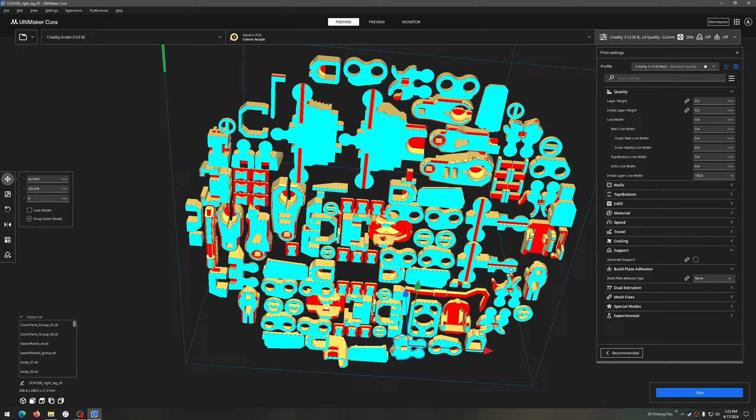Right click, arrange the models. Okay, and that's so it can automatically find the best location for it. Now if I come underneath is where I really want to look at. There's lots of parts that have like this right here.

Why? Because This right here, anything in teal is touching the build plate. And so this right here, this head, it only has these two little spots right here and here.

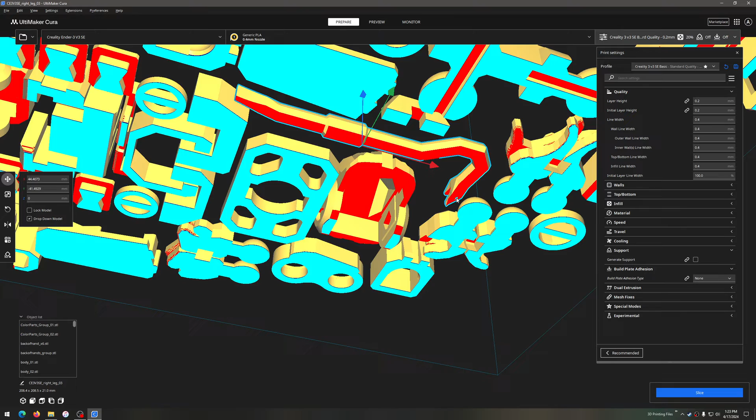And whatever this is only has this one tiny little spot, this crowbar. That little tiny spot is the only place on this entire crowbar that is touching the plate. So that's going to need supports.

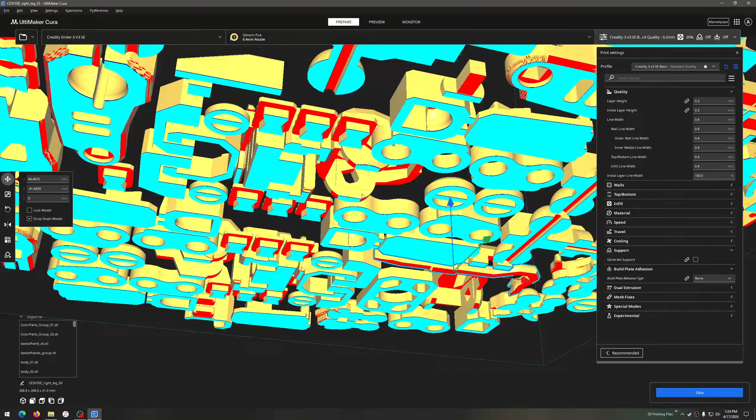It just feels like there's lots of little parts that could easily - these things, I don't know what these are, connectors. They have little tiny pieces. Here's another helmet type thing that's got just a couple of small pieces.

So that gives me pause right away to say, hey, we're gonna need some rafts or brims or something, or supports even on some of these things.

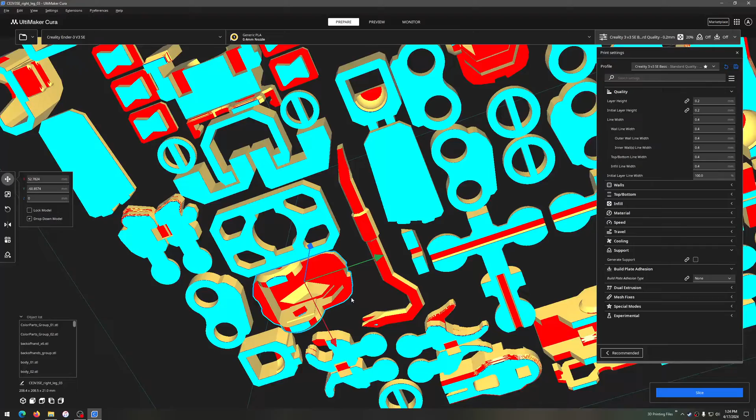Like these helmets, I don't think they're gonna print very well, especially if we look again underneath - you've got all this material under there. Maybe the developer, maybe the builder of these made these so you don't need supports inside there because they're at angles.

That could very well be, but this spot over here might need some support. So this is what I do when I first see a build.

First of all, I never do this. So I'm going to come in here, delete everything. Then I'm going to come back in from my disk.

And is there any way we can... okay, we got back of hands, we've got bodies, color parts, we got crowbars, a gun, we've got head types, we've got joints, we've got...

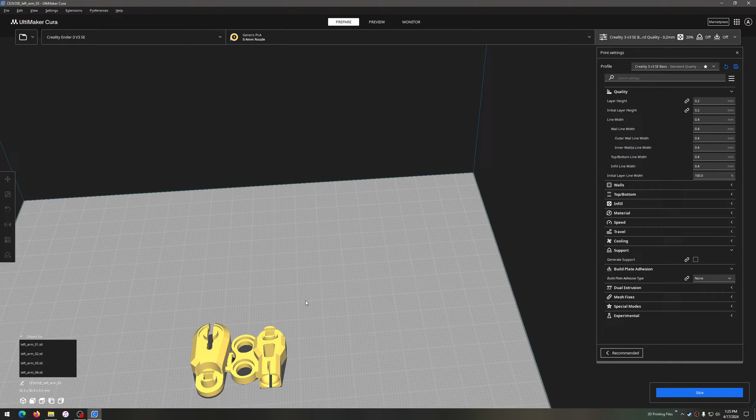Okay, so left arms. See, this is where I break it down into sections. Let's just do the left arm, let's just take a look at those pieces, because it's going to be a little bit easier to see.

Arrange all the models. And this is what I would do if I was going to print this. I'm like, alright, let me just print these.

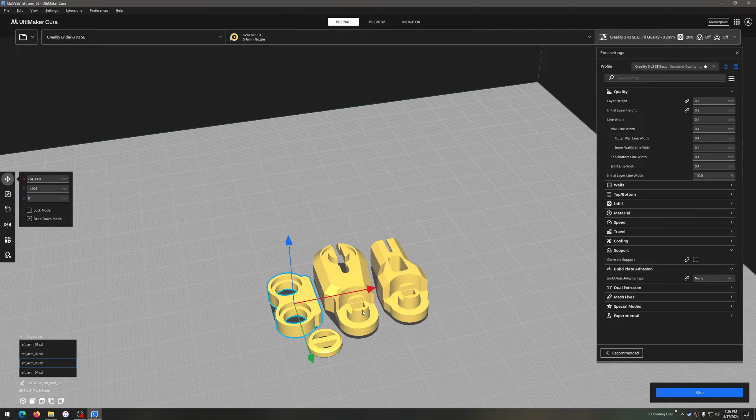And see how these turn out, because I don't want to waste a whole bunch of filament on building everything out and then have an issue with two or three of these pieces. And then I'm going to have to come back and do it again anyway.

So let's take a look at this. And I'm just using basic standard 0.2 millimeter layer height, there's nothing crazy here. I'm just going to use basic default Creality Ender 3 V3 SE settings.

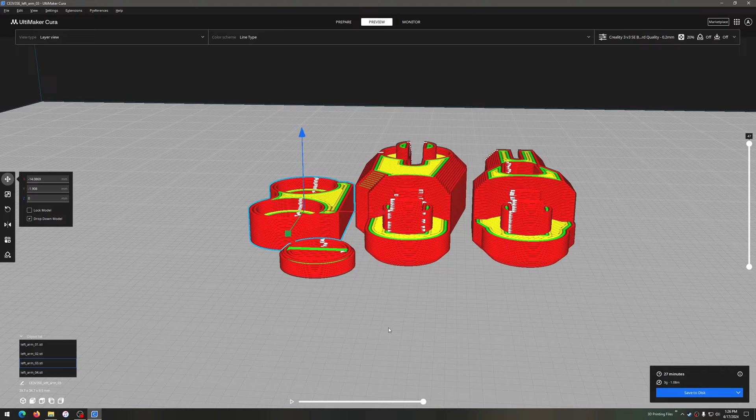So let's slice it, let's take a look. Let's just hide that to give us some more room. So here we can see how it's gonna build.

Top part's not a problem. That doesn't look too bad. I don't see why these would not print well.

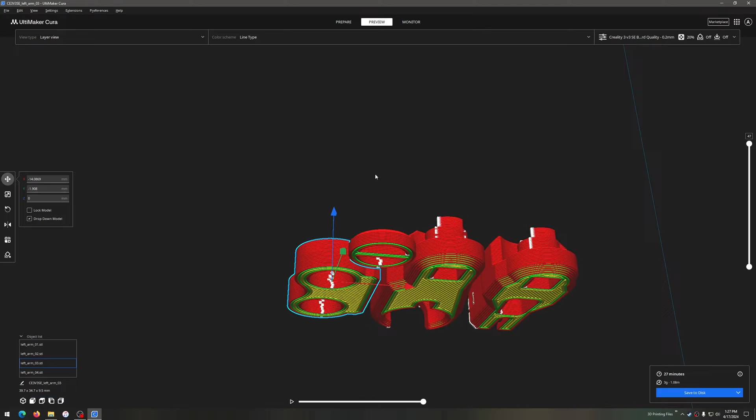Again, this is giving me pause, this one here, because there's not a ton of footprint on the build plate.

And then like here, if I drop this all the way down to layer one. Okay, so we do have some things. Okay, so it's got more than I thought on the build plate.

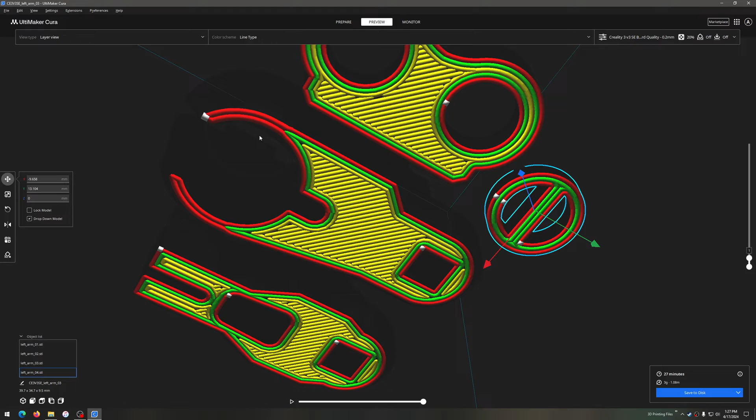Should be okay. So then what I would do is I would save this to disk. Good grief, why doesn't it remember where I just picked these files up from?

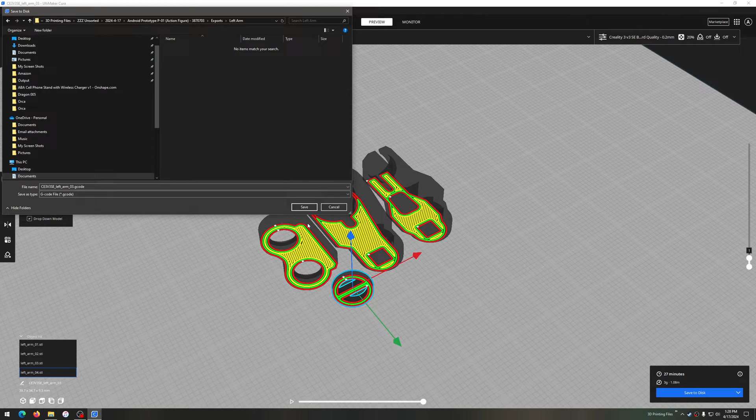So I'm going to create a new folder and call it exports. It's fine, I'm going to go in there. We're going to call this left arm. For now I just want to keep everything organized. Save it to disk. And then I believe I have to erase this.

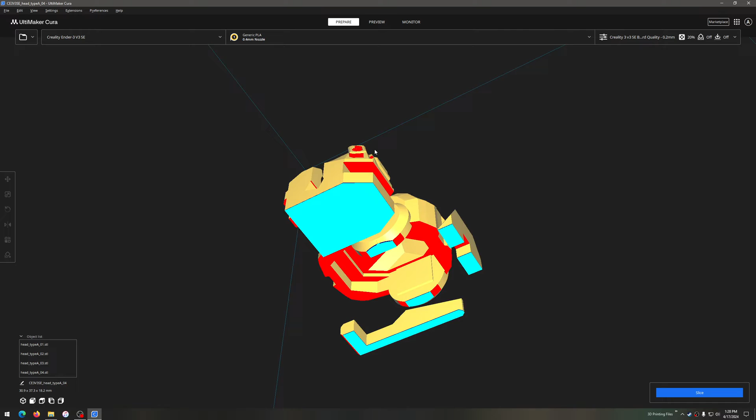I have to clear the build plate, and then I have to add more stuff. Yeah, it's a headache, it's a big process. Let's do head A. By doing this, what I'm doing is looking at every little piece and seeing how it goes. It's very rare for me to have something that I just download, slice, and print. I have to fiddle with every stinking thing.

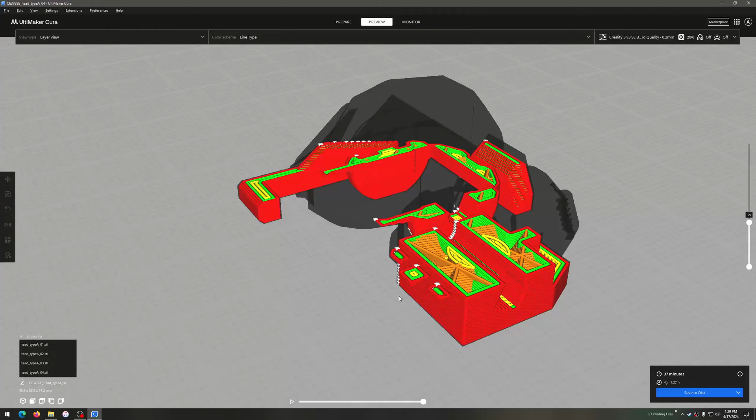Look at this, the red means it's probably going to need supports, because as this layers up, let's slice it and take a look. These parts right here are going to be a problem. We're going to need supports because as this comes up, it's going to want to try and print out in the middle. Look at that, this stuff's just floating in space. So we need supports for this, because that's an impossibility. We can't just print out into the middle of the air.

Let's go back down to layer 1. Yeah, these parts here on the helmet, I don't have a lot of confidence in these little tiny sections being solid and secure enough, especially with this overhang, to help that whole helmet get built.

So what I'm going to do is go back into prepare. I'm going to drop this down. Let's turn to supports. Where's support? Okay, let's generate supports. I'm going to leave it as tree, and then I want to just select touching build plate.

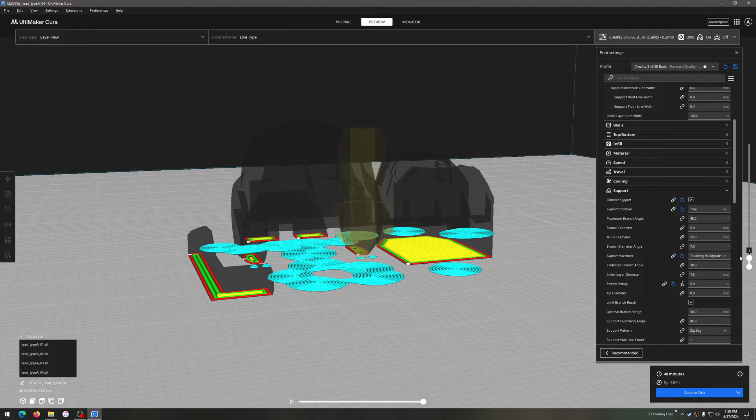Let's just try that. So what that's going to do is generate the support, but only in areas that are touching the build plate. One of the downsides is it's going to create a lot of trees there. Not really a fan of that.

Let's try normal, touching build plate. We'll slice that and see how that looks. So you got to do this. It looks like a hot mess. There's going to be a lot of post-processing cleanup, but this is going to give us the best possibility of a good print, a good outcome.

I still don't like that. What I would do is print this and see if the supports give any structural help with the actual model. So let's go up here and take a look. So the supports really don't do jack for the helmet. So I would be tempted to add...

Build plate adhesion, let's do a brim width, let's just do like 4 millimeters. It doesn't have to be huge, but I know this is crazy, this is stupid. Look at that, that's a lot of stuff, but I want it to print right the first time.

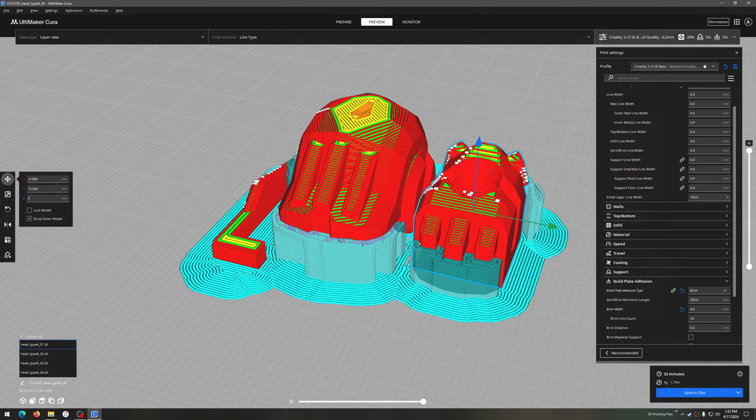This looks ugly. How about we take, yeah, we're going to have the supports. And I don't think you can do specific model settings? How about we do this? Let's take a look, let's do none brim. Let's uncheck that. And I wonder if, let's just check here. Seems like there was a spot where you could do per model settings.

So just for this helmet, I want print supports, and where does that say... generate supports. Okay, this, I definitely want supports. This one seems fine, and this one back here seems fine. Let's slice it and see what happens.

So we might be able to go through and just have, there we go. Oh, it's going to do it everywhere anyway. Then what's the point of having... what? Hang on, close that. Let's uncheck supports, no brim.

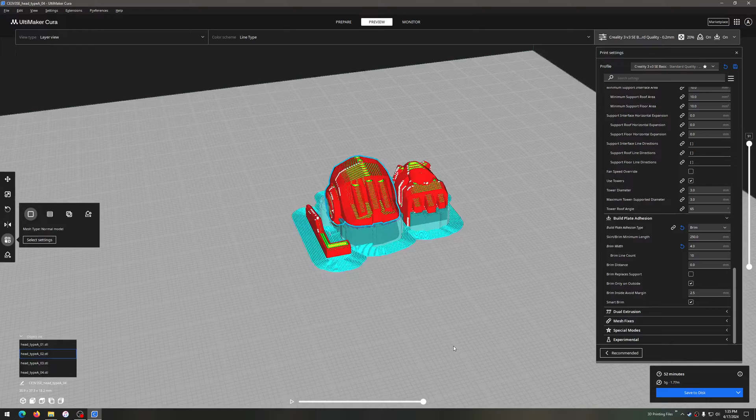What do my stats say for this print? Where's my stats on here? Oh, it's going to take an hour. It's not going to use much filament, 5 grams, that's hard, that's nothing, but it's going to take an hour to print that.

Let's save project. No, let's just save to disk. And this was head A.

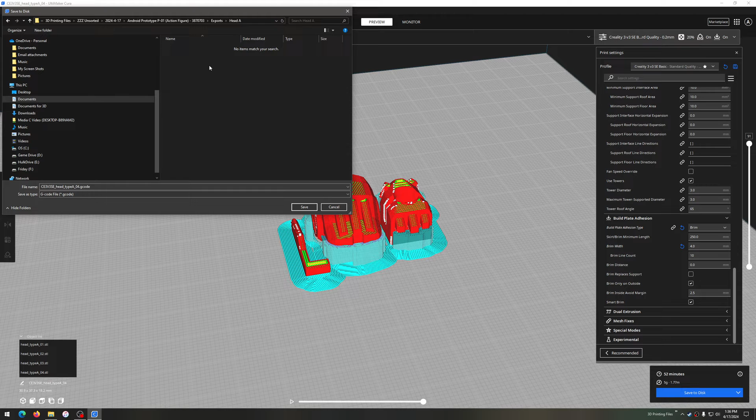Save that. Clear the build plate. What else we got? Let's take another look at some other things. This is what I do for everything, is I'll download it and then look.

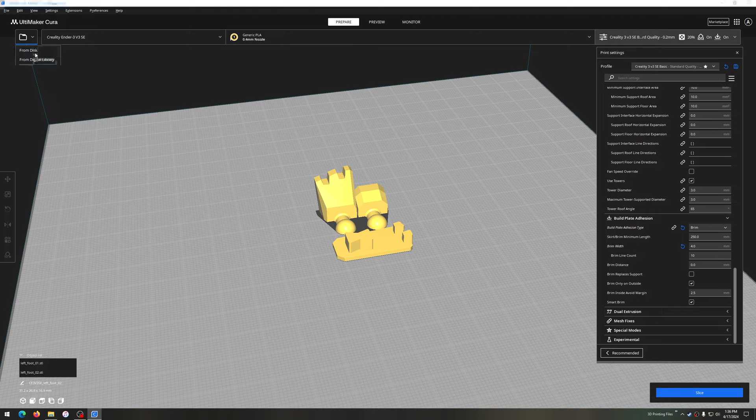Okay, so we have left arm. Let's look at left foot. It's going to be those two. Left foot shouldn't be too bad. Let's arrange those. Let's add left leg. Leggy boy, left leg, there's parts, 5, 6, 7, I don't know.

Arrange the models, take a look at the underside. That looks pretty good. This should print just fine, bridging might be able to take care of that. Let's just slice it and see what happens. But I've got brim already set, so it's going to put the brim on. And then I have support set, so it's going to add the supports. Cura.

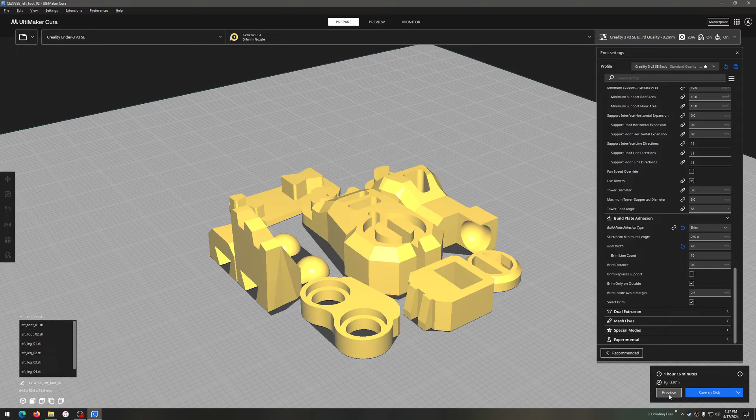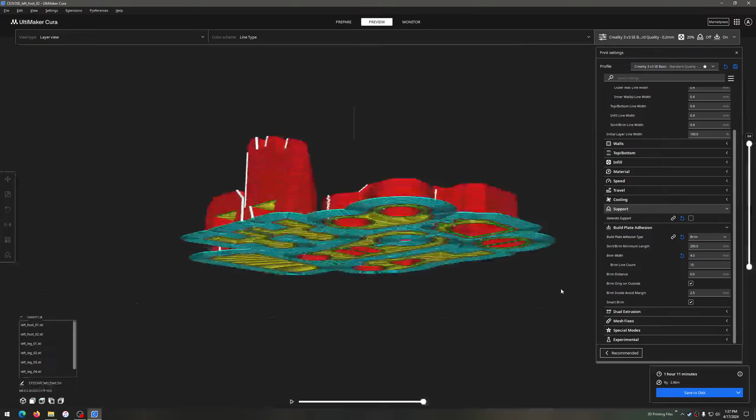I mean, you could leave the supports or the bridging on. I'm going to turn supports off, reslice it. Also, that seems like a lot of brim. It's only 4 millimeters, but this is going to make sure that all these parts that have not so much sticky to the bed part are going to have more sticky to the bed part. It just helps make sure that this is going to just print. So that's going to take an hour and 11 minutes.

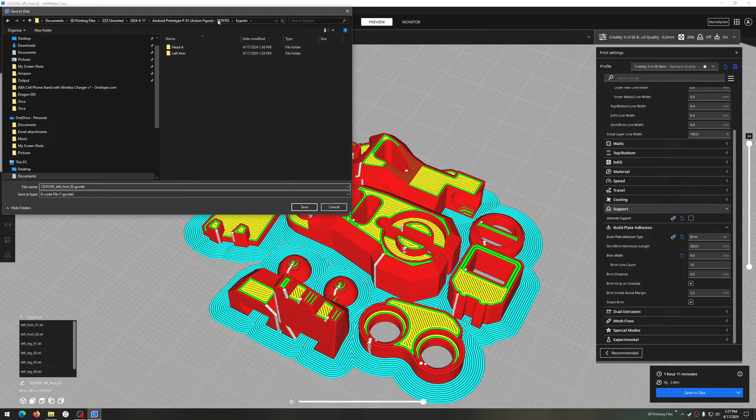Let's save that to disk. But I'm breaking this down so that I can inspect all the parts. Let's clear the build plate. I got to go to prepare.

Let's go back and look at our files. Where's the other thing here? The crowbar. That doesn't have, I mean, if you look at that, you can see through it. So that doesn't need any adhesion, but I am going to add supports normal touching the build plate, and we're going to slice that and preview it. So this is going to be a much better outcome. So we'll save that to disk, and now we can just say, you know, crowbar. We'll just leave that out here. There's not much to that.

Okay, go back to preview, right click, clear the plate. Let's take another look at some other things. Let's look at the body. Body 1, 2, 3. But again, Tim, I know I keep saying it, but this is what I do. This is, you got to do this for everything. Look at that. There's no way that this is going to print okay. One, look at all the parts of it that are hanging in the air, and it just has this one little spot on the bed.

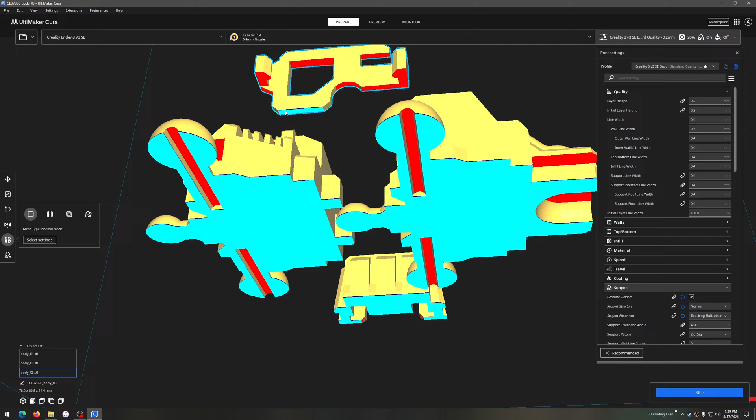That ain't gonna work. I have zero faith in that. Zero faith. Other than that, I think there's nothing in here that I would really need. I don't think I need supports. I might do it anyway. Let's do it just because of these overhangs. I don't like these overhangs. And this section back here, we got all kinds of overhangs.

So I would tree this. Let's go into supports, let's hit tree. And then I'm going to also do brim on the bed adhesion at the 4 millimeters. Let's slice it and see how this looks. I said slice it.

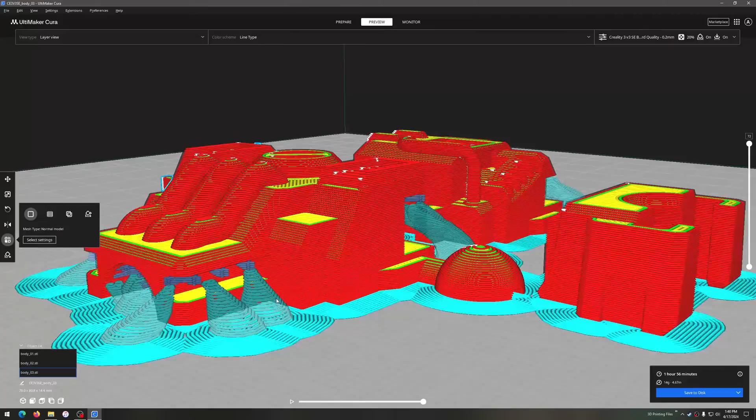So this is using the Ultimaker Cura slicer. It's going to take 2 hours, 14 grams, not much, but look at that. All these places that are going to have supports are getting them from the trees. Okay, the tree supports, but this one specifically that we were having a concern about is now getting brims and tree supports. So I have high confidence that that's going to print and not have any issues.

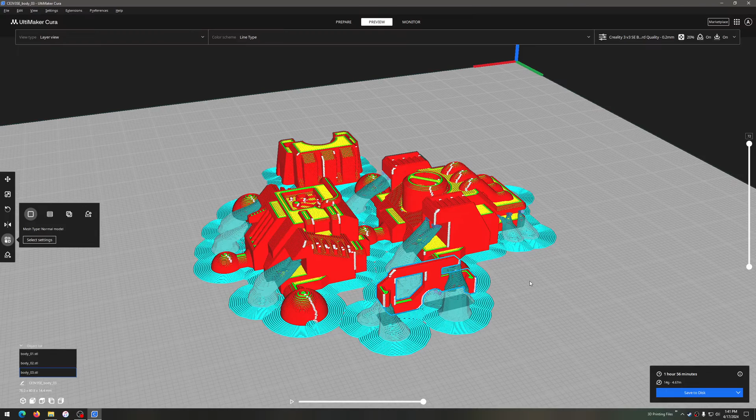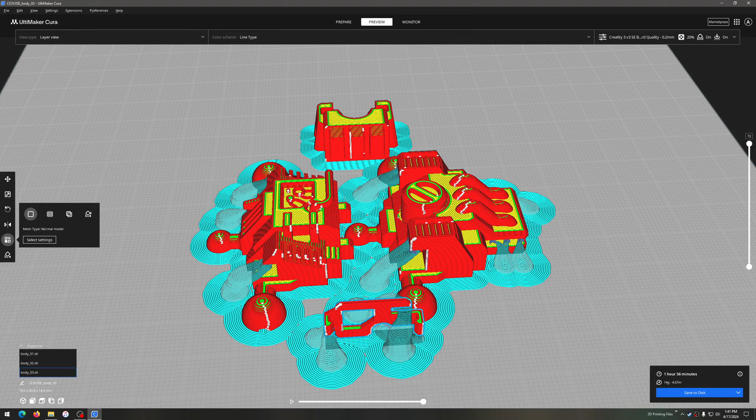Yes, it's a hot mess. Yes, it's going to take 2 hours. So when you break it all down like this, your one robot thing is going to take all day, but you know it's going to be done right. It's going to be done good. There's going to be some cleanup, which isn't a problem. These trees and all these supports really easily break away. It shouldn't be any issue.

Let's save that to disk for funsies. We'll just leave that called body. Now I'm going to go switch over to Orca Slicer and take a look at these files in Orca Slicer just to have a little bit of comparison and show why I like Orca, just because it has a little bit more functionality that I would want to see. So let's open a new project. We're going to come in here and we're going to grab the same files.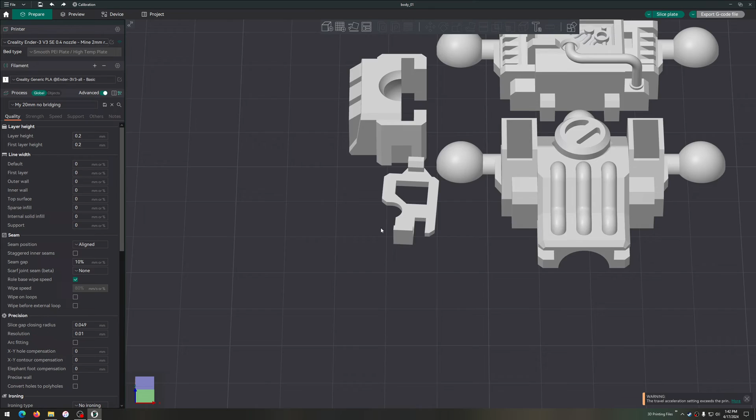I'm going to break them up into just as I would if I were going to build this myself. I'll select those three and import them all separately. This is auto orient, so it orients the objects as how the slicer can best handle it. This is going to arrange the objects. We can see right away it's automatically put this part that we had to put a bunch of trees on. You could arrange that in Cura, but you have to do it manually. This is really nice, it just slaps it right down.

Now it's got a much bigger footprint. So when I slice this, we'll be able to see how much of that actually hits the floor, and it looks like a lot more than just this little section up here. So I could probably print this no problem, no skirts, no brims, none of that stuff.

Let's go back into prepare. But we still have those overhangs that I'm kind of concerned about. So what I'm going to do is come over here to support. I'm going to turn on my supports and I'm going to do tree auto, and slice it again and see what we get.

Let's ramp this all the way up. So it does print trees, but as you can see, it doesn't print as many. It just puts the tree supports right where you want them. It builds right off of here, and I've used this on several parts. These snap off really easily, they don't have a problem.

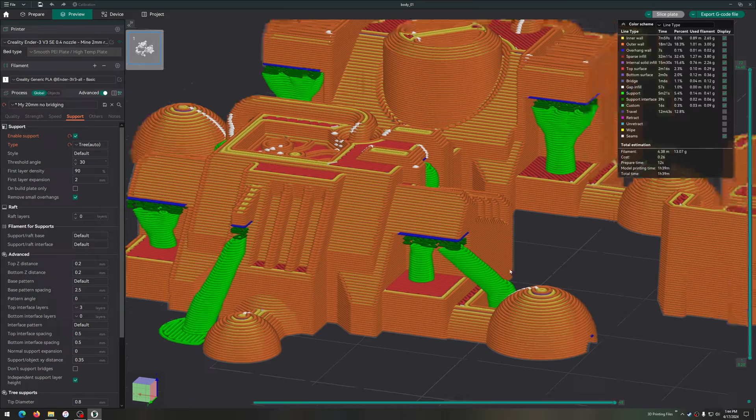And this only takes an hour and 39 minutes. It's going to use 13 grams of filament, it's going to cost me about 26 cents. But look at this, I don't have hardly any parts that I need support for that.

So one of the other nice things about Orca is, let's say I want to group a bunch of these, I can name this plate body. Let's rename it correctly, Aaron. Body. I can add another plate and then import other things. So that was the body.

Let's go back and do head type A. We're going to import that. Load these files as a single object with multiple parts? No, I want them all to be their own separate thing. And here, through auto orient and then auto arrange, we can see that Orca has already set this up to be the best print.

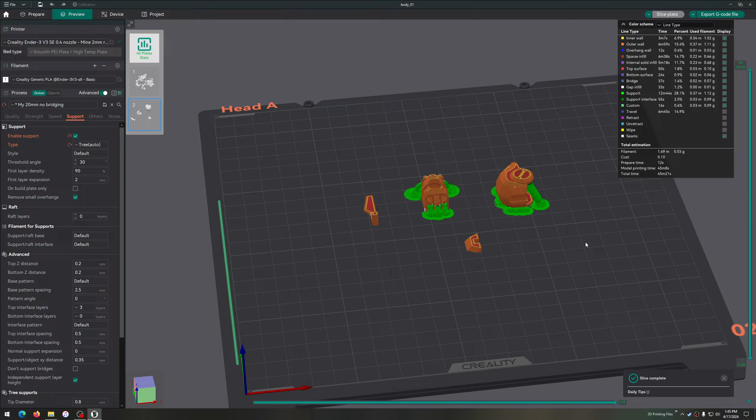This is going to be head A. And I'm going to take another, let's just go ahead and slice it, because we're using global settings here, and that should be okay. If we look underneath, I feel confident. It's a small piece, it's not very tall, but it does have a nice footprint for the size of the piece. And again, these tree supports are going to snap right off, not a problem.

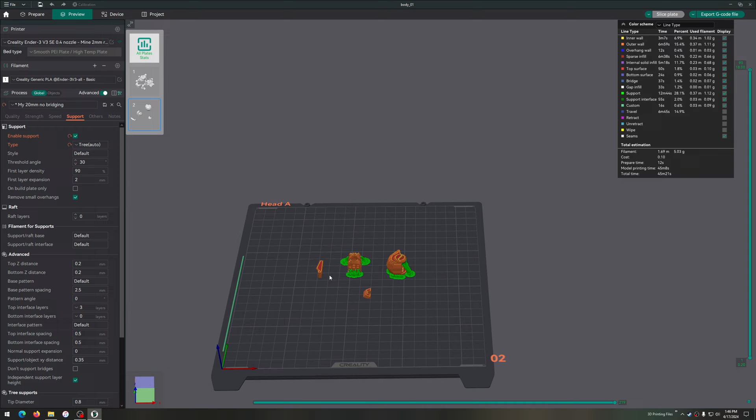Now, if I want to in Orca, let's say these two small parts, I really want a brim on those. I come over here on process on the left-hand side, and instead of global, I hit objects. I select the object and prepare, I select the object that I want. I come over to others and I say yes, add a brim to the outer parts only. Brim width, let's do 4 again. And now what this is saying is specifically for this part, it has different settings than global.

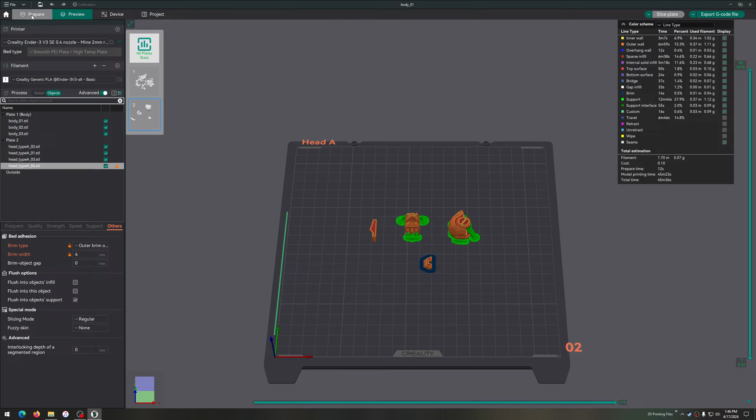And now when I slice it, just this part has that brim. So if I have a part of a project that I'm not 100% confident with, I can go in and specifically say, hey, treat this one a little bit differently than everything else. Okay, so I can keep on doing that.

Let's add another plate, let's grab some more parts. That was head A, let's grab left arm parts, and we're going to grab those. No, we don't want them all as one piece. We're going to auto orient, we're going to auto arrange. There we go.

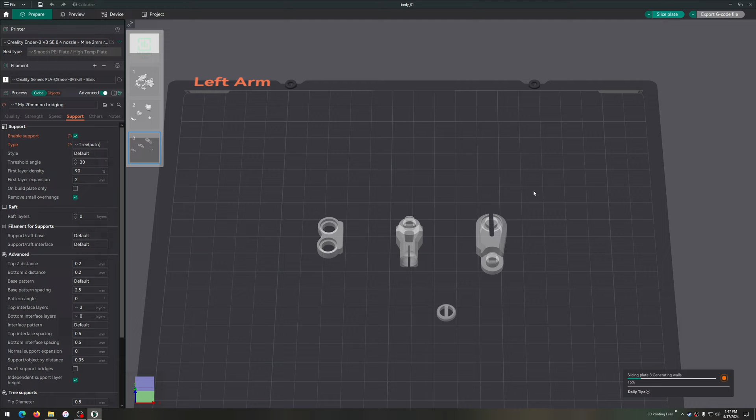And it's still grabbing all of the globals. Left arm, it's grabbing all of the global settings, so it's going to get tree supports, which I'm fine with, I don't have a problem with that. And then what I could do is if I really wanted to, so I've got all my parts spread out.

Now that I have everything inspected and the way I like it, I hold shift, click and drag to move those over here, click and drag, and then auto orient, and it's going to do it all again. If I hit slice, all the settings I've set, including these brims, should still be there. Yep, so this is a good way to inspect the parts.

Let's say I just want different head colors, this lets me keep everything separate or together as I want, right? I can even come over here, right click. Do I have copy? Let's copy, let's paste. You can Control C, Control V to copy paste on your Windows machine.

So I can copy that as a group, copy this, copy it down. Now I still have my sources, so if I want different body colors, I can have this one. We'll rename this one complete. Now we did see one in here that was, you mentioned something about pins, joint pins, pin groups.

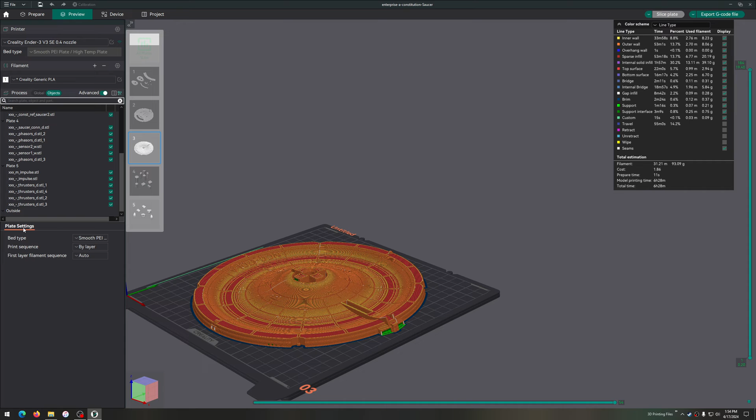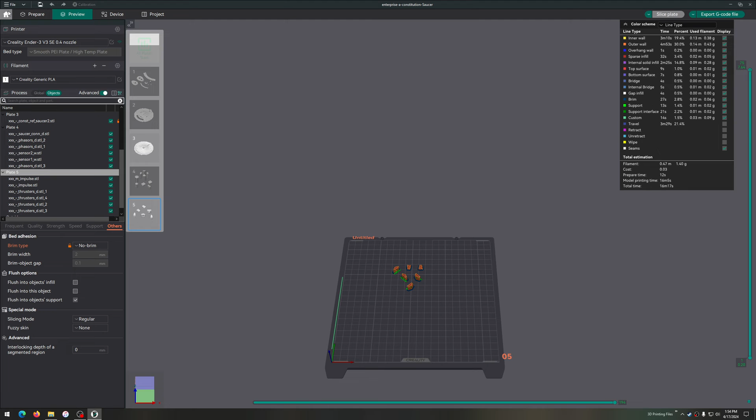Oh, I'm in preview. Click on this, others. I don't need a brim on this. And if I re-slice it, the brim should be gone, but everything else should be there as it is. And if I go back and look at my parts, the brims are still there. So Orca Slicer gives you a lot of customizability for these kinds of things.

So let's take another look here at where's Vader's lightsaber parts. Here we go. This one is, I broke it, Darth Vader's lightsaber parts. These are all the black parts I need.

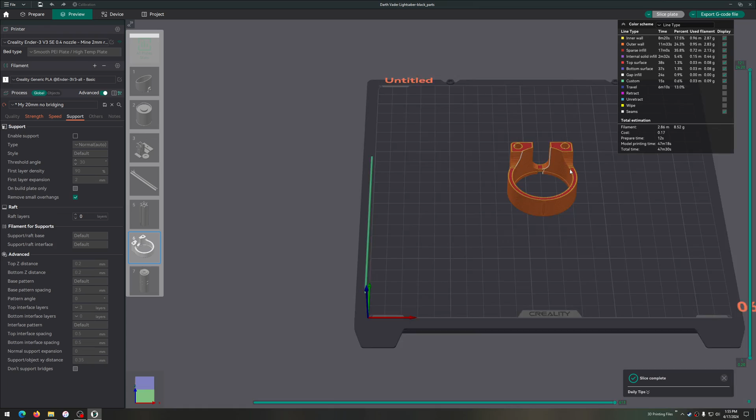And so I was able to come in here and put each thing on its own plate, ensuring that it builds by itself. If I take a look at this plate and slice it, it's going to take an hour, but I want a ton of control over how these are going. So if this screws up, I just got to reprint this. I don't have to worry about reprinting the entire bed of all the parts. I could do that if I wanted to.

This part's going to take another hour and 16. I think probably because I got some crazy infill in here because I wanted this as part of the handle and I want it to be more solid than the rest of them. So that's got some pretty good infill, whereas these parts probably don't.

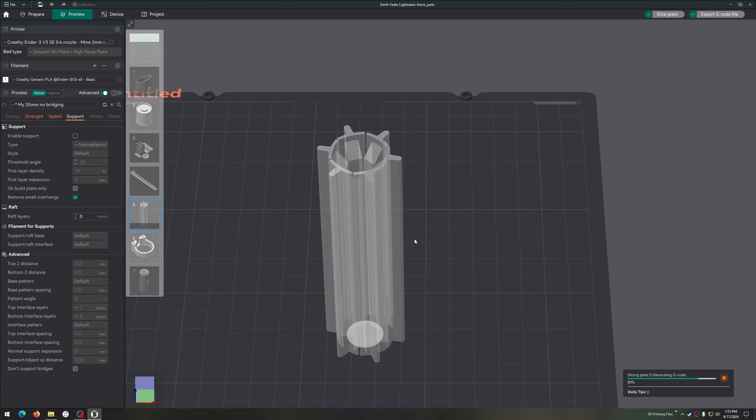These are the parts I was telling you about. They're tall when they print up and they're curved. So when it gets really tall, it can vibrate a little bit. This is a 3.5 hour print. Still has infill in there, which is fine. I don't care about that. I mean, if I wanted to, I could do lightning or no infill. It'd probably print just fine.

So anyway, that's how I do it in Orca Slicer, just to get, like I said, it just gives me more control over how I slice things and how I do things.

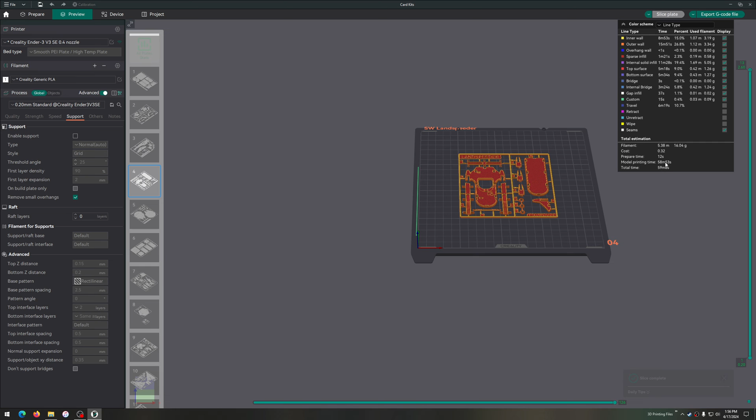Like here, let me go to my kit cards. I found a bunch. These are the ones that I wanted to print, and I've got each one named out on its own plate. So if I want to print out just a speeder, I can click on here, arrange the object, slice that, but this is one project where I can have all of my kit cards. It's going to take me an hour to print this off. It's going to take 16 grams, 32 cents, but it's going to print off that whole kit card in an hour.

And that way I just have everything there. So that's how I do that. Here's another one.

I was building these Factorio science packs for funsies. I'm like, I'm going to make 1,000 of each color. It's going to be so fun and just be something to do. And it works great. I have a couple of problems with it.

But here you can see, here's how I'm going to print one of the packs and then one of the tops that goes onto it. I can slice that, and it's going to take me 4 minutes. Not a problem, and I printed these. This does not need any kind of brim or anything. It somehow prints just fine through trial, like, you know, that's how I was like, well, let's just see if it prints. If it doesn't print, it's fine. I wasted 4 minutes. If I need to add a brim to it, I'll add a brim to it.

So once I figured out these print just fine, here's a bed that has, I think this is 200 of the tops. This has 200 of the tops, and let's just do a select. Yeah, this is 100 of the bottles, and then 200 of the tops.

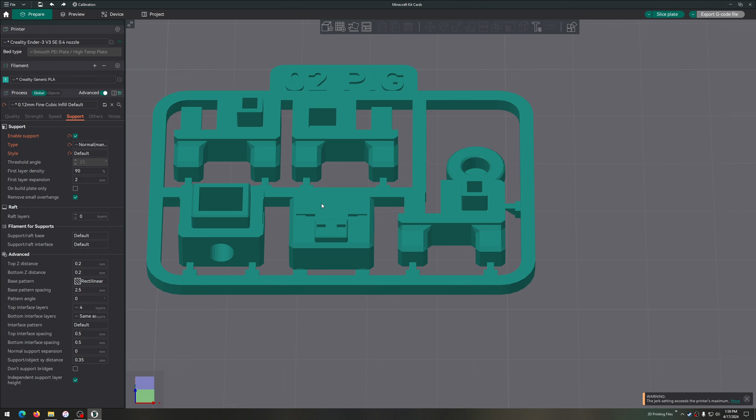And even then, sometimes you got some problems. So, oh, here's Minecraft kit cards. Found a bunch of Minecraft ones too. So if I want pigs, I can just come here and print off a pig. Anyway, that's how I use Orca Slicer.